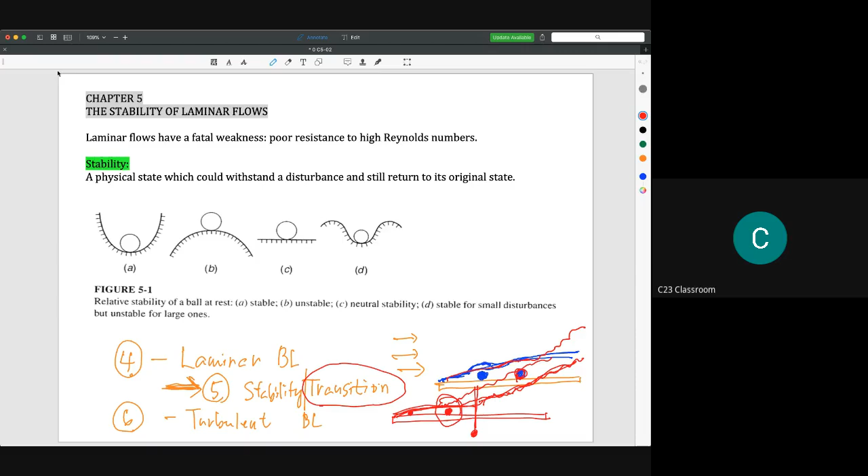So these are a few notes that I took from the textbooks. For chapter 5, the notes I give you are simple, because I think it is more worthwhile for you to know how to solve the problems according to a few equations, including the Falkner-Skan equation, later on in the tutorial.

Okay, so laminar flows have a fatal weakness: poor resistance to high Reynolds numbers. Here it means that laminar flow can change into turbulent if the Reynolds number becomes higher and higher.

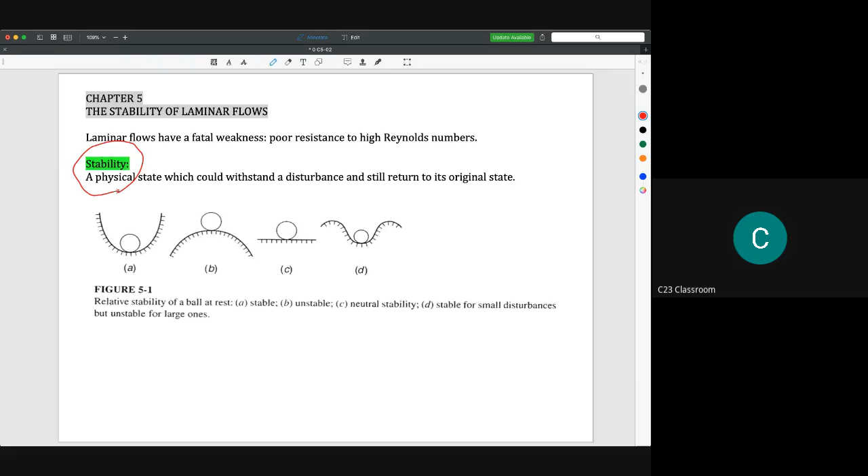And then here is the terminology of stability, which is a physical state which could withstand a disturbance and still return to its original state. So when you say some condition is stable, for example condition A is a stable one, it means that you have a deep curved surface like this, and then you have a ball here.

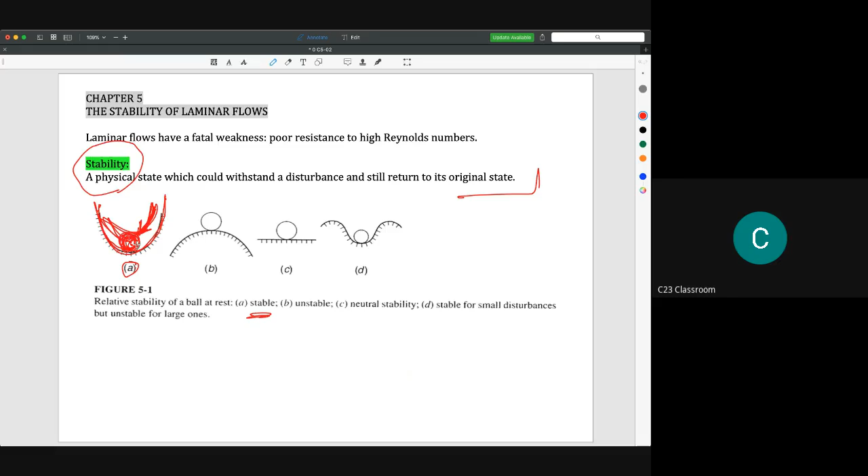You could give either a small disturbance or a very hard disturbance. You could push this ball very hard. The ball keeps rolling like this, keeps moving like this, and finally it will return to its original position. So this condition is actually very stable. It doesn't matter what force you give, the ball will remain in its original position.

And B here is totally unstable, because just applying a very small force here, the ball will roll and go to another location, and it will never have the possibility to return to its original position. And then C, we call it neutral stability. Neutral stability means that it depends on the disturbance.

So you give a very small disturbance, it will roll, it will move to another point. It will never go back to its original location, but it will remain stable on that point for that time. Okay.

And then we have D here, so maybe it is stable, but it's only valid for the small disturbance. So if you have a big force applied on this ball, the ball will move to another location and it will not return to its original position. So the keyword for stability is when you apply any force, the condition will go back to its normal condition. So this is stable.

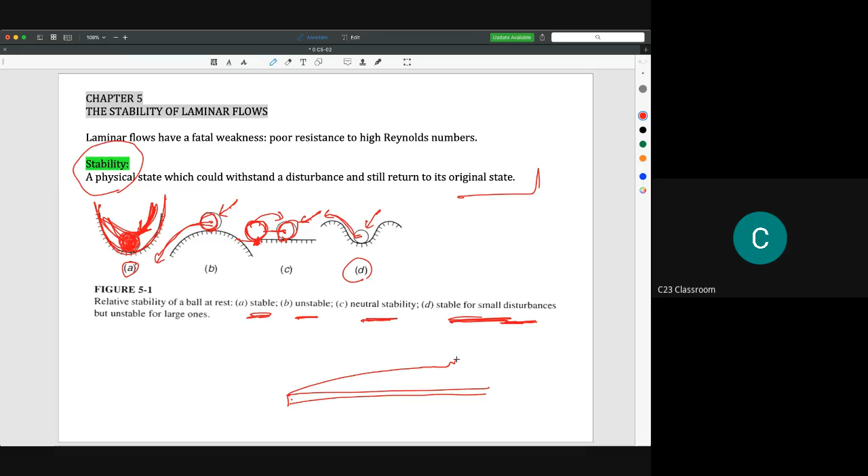So as I said, if you have a boundary layer like this one, this is laminar and then it will become turbulent. So if you put anything here, it can be a trip wire or it can be a rough surface and so on and so forth, the laminar boundary layer will remain in its condition. So this is the definition of stability.

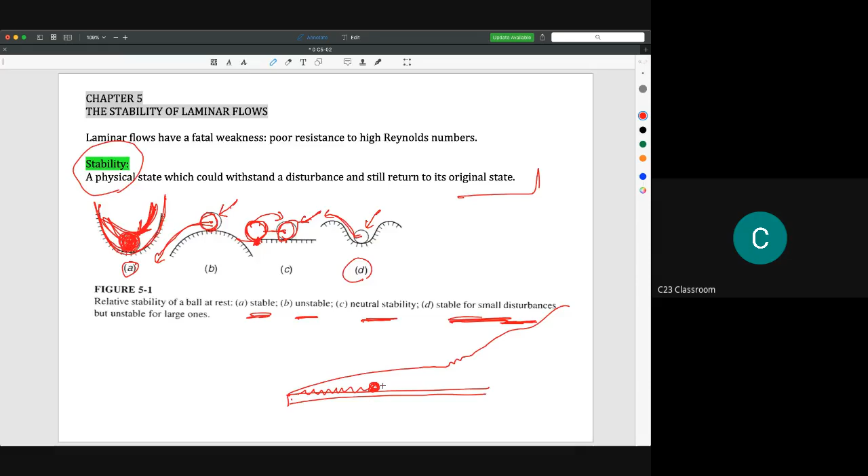And then when the laminar condition changes into turbulent, there will be a transition period, so we call it a transition. Why is the transition sometimes very important? Because, for example, if we have a flat plate like this one with a high Reynolds number, you will find that the laminar will change into turbulent in a very short period.

However, if you have a low or intermediate, middle range Reynolds number, the change from laminar to turbulent will occur over a certain period. For example, we have laminar here, then it starts the transition, and then turbulent. The longer the transition period, the more we need to calculate all the data about the transition. Okay, that's the first idea.

The second one is, the transition shows that this area is fully laminar, and this area is fully turbulent. And in the transition period here, there is a percentage between laminar and turbulent. For example, at this area maybe it is 20% turbulent and 80% laminar. At this one it might be 50-50. At this one it might be 95% turbulent and 5% laminar, and so on.

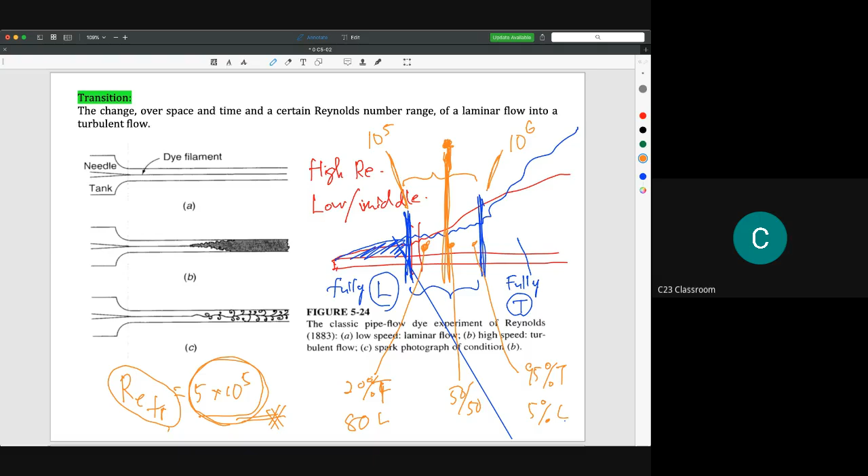And for the Reynolds transition, the common experiment is the pipe flow dye experiment. This is the common experiment to show the existence of laminar and turbulent flow. For example, we have a pipe like this one. If the velocity is low, meaning the Reynolds number is low, you could see a thin line of colored dye flowing inside the pipe.

When you increase the velocity, you will find that the dye can still be seen and it starts to spread in the pipe. You could still see the ink, because the meaning of when you could see the ink is that the ink is still, in common words, we could say like this one.

So why we could see the color of the ink here is because the molecules of ink flow in a group like that one. And then when the velocity increases, the streamlines start to become chaotic and start to cross each other. So it breaks the group of this ink.

So when another streamline comes in like this and so on, it starts to separate the group of ink. And then the ink will be a little bit separated like this, but the distance is quite small. Because the distance is quite small, you could still see the color.

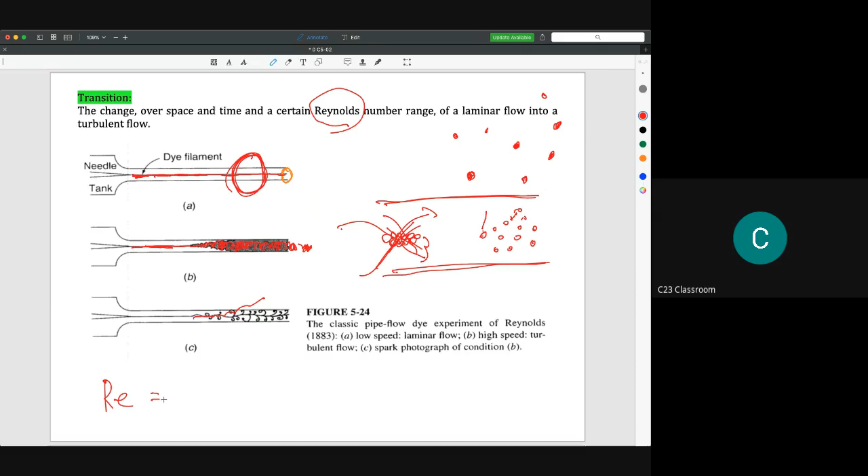So the Reynolds number in flow in pipe. This is the flow in pipe. The Reynolds number is rho VD over mu. If the number is greater than 4,000, the flow is fully turbulent. If the number is less than 2,000, we assume it is fully laminar. Numbers between 2,000 and 4,000, we assume it is a transition.

But we are focusing on the boundary layer, meaning the flow over a flat plate. In flow over a flat plate, the Reynolds number is rho VL over mu, where L is the length of the flat plate. Rho is the density, V is the free stream velocity, and mu is the dynamic viscosity.

For flow on a flat plate like this one, the transition is 5 times 10 to the power of 5. If the number is greater than 5 times 10 to the power of 5, the flow is considered turbulent. Less than that, we could still assume it is laminar, because we assume the percentage of turbulence occurring in the boundary layer region is less than 50%. So this is the common assumption about the transition Reynolds number for flow on a flat plate.

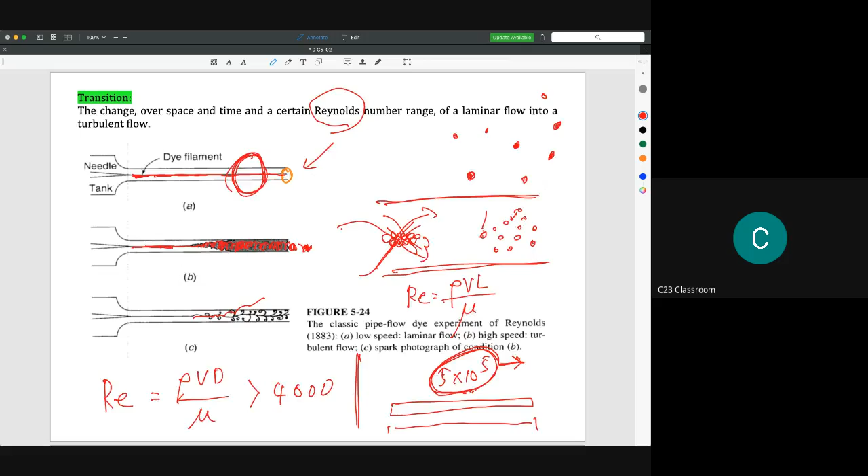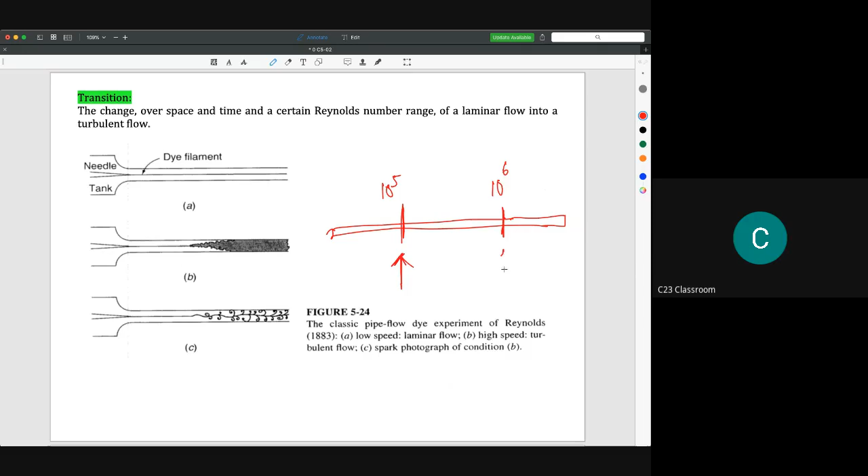Okay, so the limit is, in research, sometimes people say that at 10 to the power of 5, the percentage of turbulence starts to occur, maybe 1%, 2%, and so on. And then if the Reynolds number is 10 to the power of 6, it is 100% turbulent. This is quite a strong opinion about laminar and turbulence. So this is the range of transition.

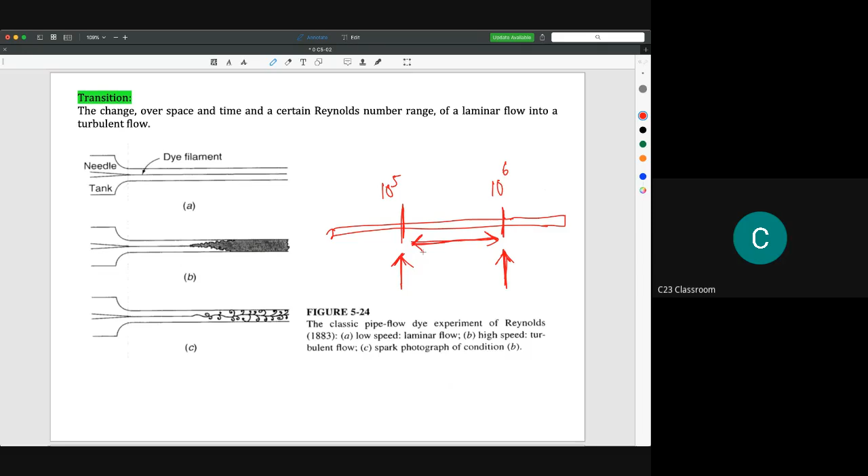But sometimes transition will occur very fast, meaning the transition region is very small. In some calculations, we assume that the effect of the transition will not be counted. So for that one, we take the average here. We take 5 times 10 to the power of 5 as the transition Reynolds number.

It means this is just the borderline: if your Reynolds number is less than 5 times 10 to the power of 5, you could use the laminar boundary layer equations. If your Reynolds number is greater than 5 times 10 to the power of 5, you need to assume that your boundary layer is turbulent. But it depends on the question. If the question says take 3 times 10 to the power of 5 as the transition number, you need to take 3 times 10 to the power of 5.

Okay, doctor, thank you. Okay.

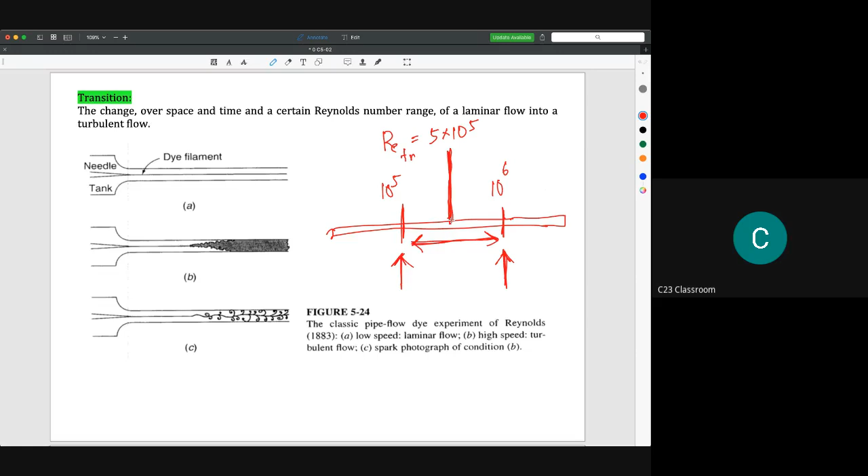So this is about the observation of the turbulent boundary layer. If the laminar flow is stable, you will find that the image of the flow is clear. It occurs both for air and for liquid, for water. For example, a simple example: a waterfall, not a natural waterfall. If you have a slope here, and water starts to flow on the slope.

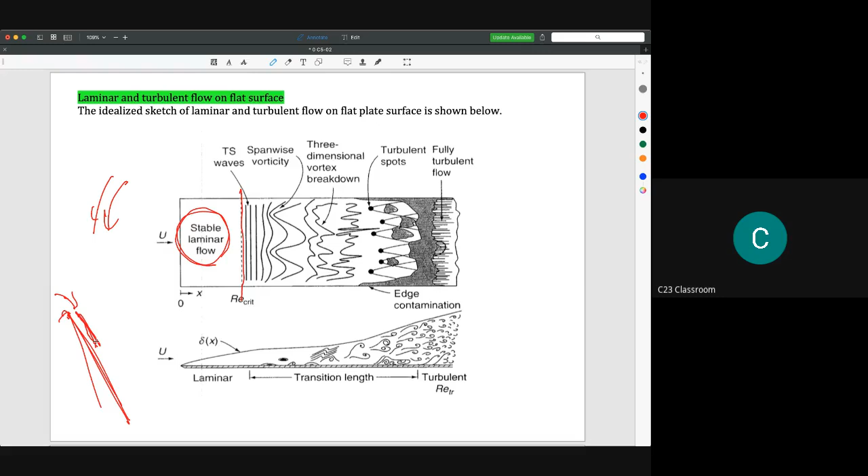At the beginning the water is laminar, so it's very smooth. Then it starts to have a few bubbles, and then it becomes a very rough wave. So we assume this is the laminar flow, this is the transition, TR, and this is the turbulent. In the laminar region you can see very clearly, you can see the surface at the bottom.

But at the transition, you cannot see the image of the bottom plate clearly, and in the turbulent region you will find many bubbles, many rough waves, and so on. This is what this image tries to tell us: for a stable laminar boundary layer it's very clear, there is no signal. Then if turbulence starts to occur, you will have the transition wave, and then a little vorticity, and so on.

I hope you could read this from the textbook, or Google laminar and turbulent boundary layers. This is how researchers make observations to prove or validate their assumption of the Reynolds transition. But in these topics, we will use the Reynolds transition number given in the question, or make our simple assumption, which is 5 times 10 to the power of 5.

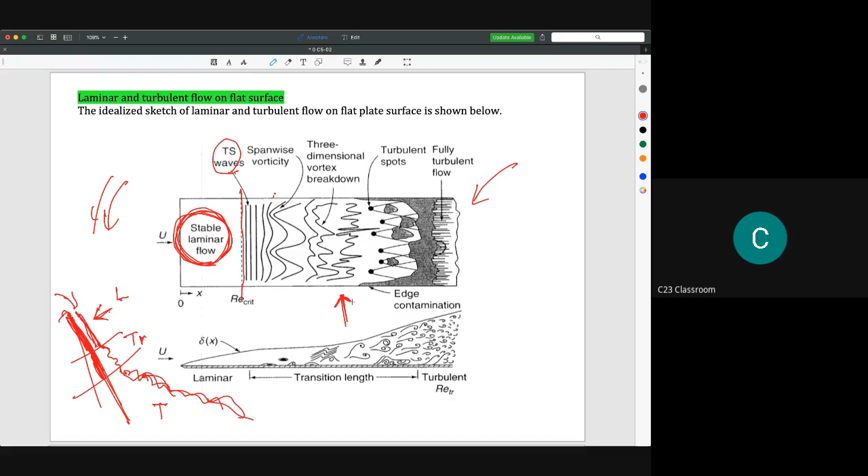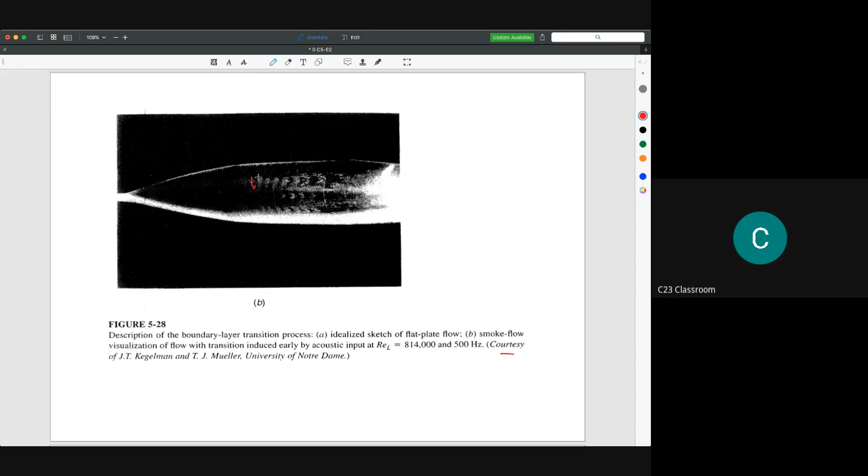This you could get from the textbook, some experiments conducted by White and by this researcher. You could see that the wave here may be the evidence of the turbulent boundary layer.

Now I would like to show you a few equations used in chapter 5. I'm not going to explain how these equations are derived, but after this we are going for a tutorial, so we can see how these equations are used to solve certain problems. First is the Falkner-Skan solution. As I said in the previous class, the Falkner-Skan solution is actually an extension of Blasius.

The idea is Falkner-Skan used the same method Blasius used to derive the equation. We will see this derivation at the end, because I changed the syllabus a little. I think it is important for us to see the tutorial, the mathematical calculation, first, and then at the end I will explain how people did this, including the Navier-Stokes equations and their use in Blasius.

So here, for example, Blasius uses the idea of eta. Later I will explain eta in the last chapter, chapter 6. Eta comes from the similarity conducted by Blasius. Finally, Blasius has the similarity variable y times the square root of U over 2 nu x. Here nu is not velocity, it is the kinematic viscosity. In Falkner-Skan they use the same idea, but they add a value here.

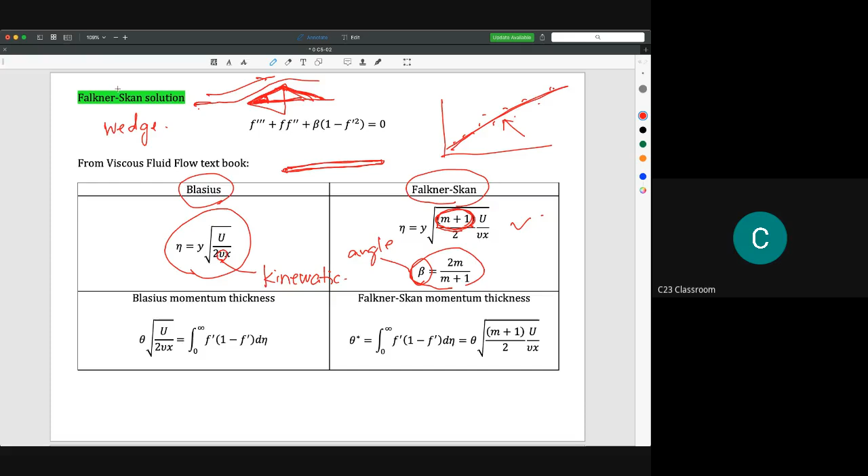And then I would like to say, if you compare the Blasius equation from my previous solution, you will find that in my notes that I gave you in PDF, eta is equal to y square root u over nu x. There is no 2. I hope you could read from the textbooks. You will find that there are actually two versions of the Blasius calculation. I'm using the one without the 2 here.

If you compare my notes in PDF with the notes from the textbook, you will find that in my notes I have number 2 in my equation here. So we have 2f f prime: f triple prime plus 2f f prime. That's why there is no 2 in the eta. But in the textbook, they write the equation like this one, so the 2 will appear at this term. So that is the first difference.

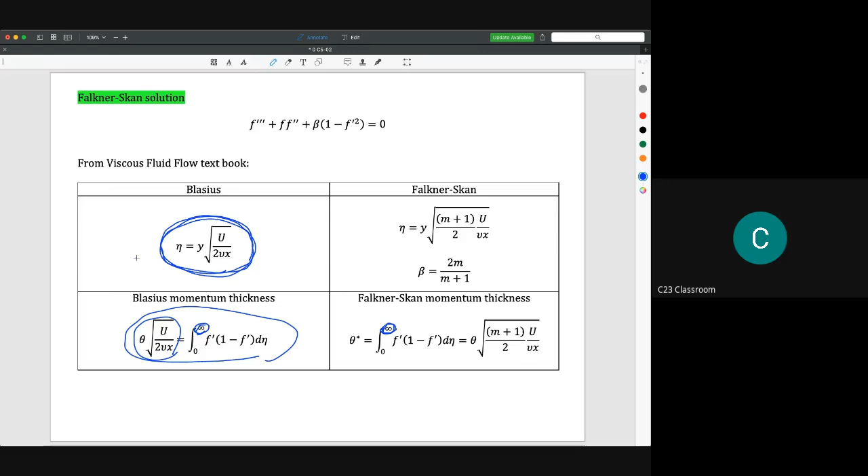Okay, so if you see the Blasius momentum here, this is from momentum, and then we have changed into the limit from 0 to infinity. The idea here, we have a flat plate. Previously we learned about the Couette flow and the Poiseuille flow, meaning the flow inside a pipe or flow between two plates. For flow between two plates, it has a very clear limit from the bottom wall to the upper wall. So you could say this is y equal to 0 and this is y equal to h, because you have a very clear limit.

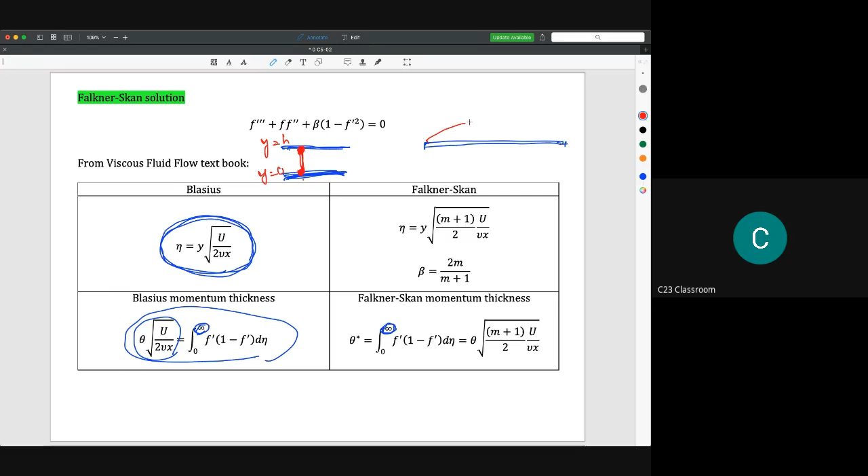But for the boundary layer, you are still doing the integral on the y-axis, but the clear limit is at the bottom here, y equal to 0. For the top, sometimes you will see that y is equal to delta, if you are doing it with y. However, if you are doing it with eta, people will change it into infinity, because at this stage, the general equation is written with infinity here.

But later on, I will show you in another tutorial that we could have a number for this limit. This is just a very general equation. The idea is that at the end of this boundary layer, it is not a very clear limit, so in the general equation we put infinity as the upper limit. Later on in the tutorial, you will find that we use the same equation and we could get these limits, because we have an equation. Now it is quite difficult for me to explain. Is that okay? Okay, doctor. Thank you very much. So this is just the general notes first.

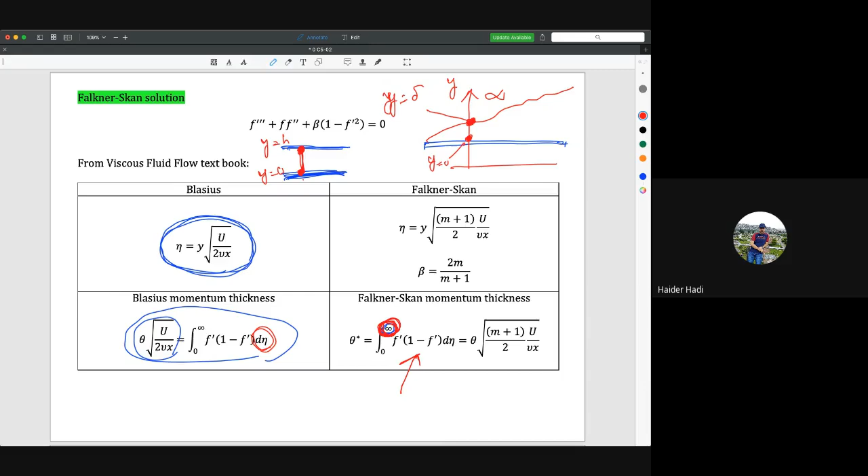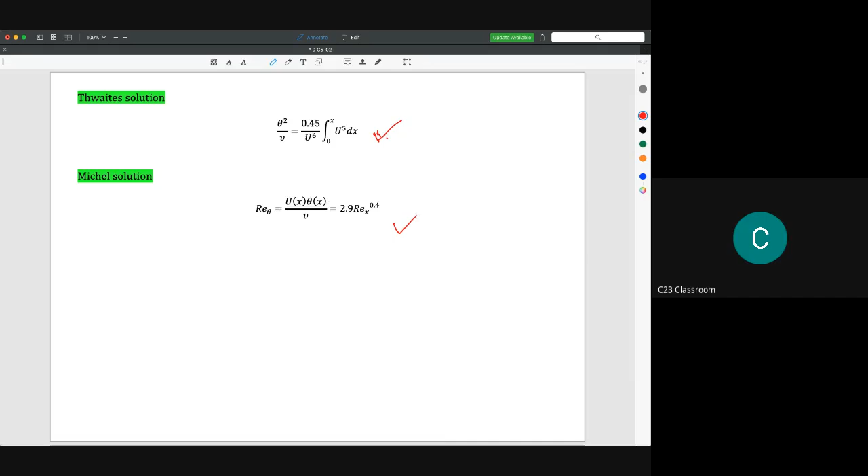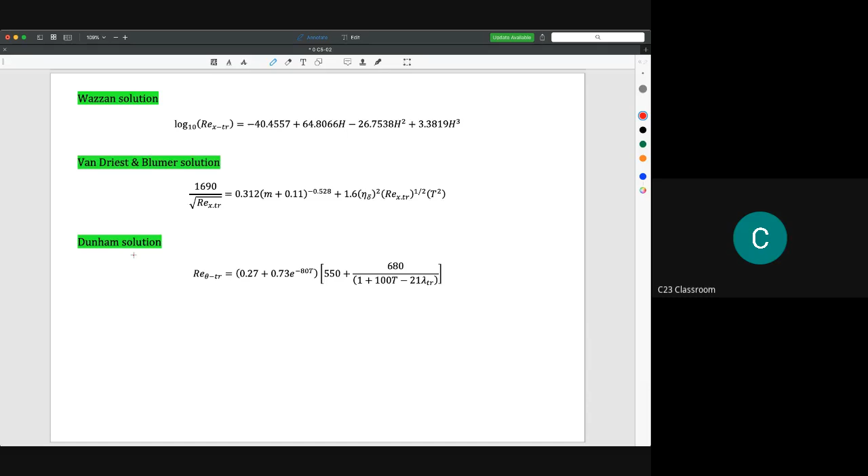And then for this one, the Thwaites solution, I just give it here. I hope you could screenshot the video later, or go back to the textbooks. This equation is the final equation, because sometimes textbooks give you a lot of equations and you cannot choose which equation needs to be used. So this is the Thwaites solution, the Michel solution, the Wazzan solution, and so on. We have the Van Driest and Blumer solution and the Dunham solution. All of these solutions, inshallah, I will show you in the tutorial.